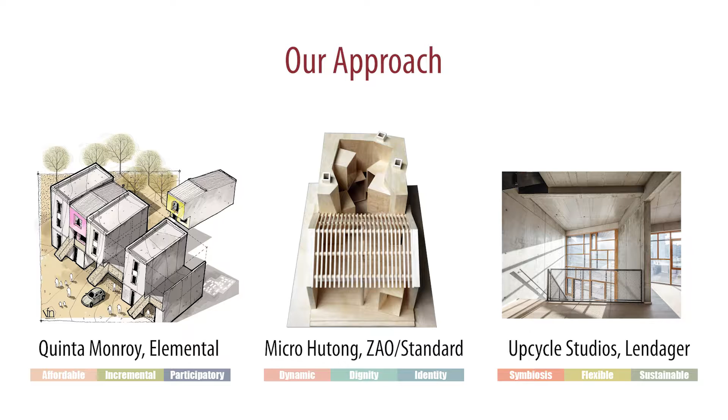By analyzing existing policies and case studies, the toolkit comes up with three things: habitability, adaptability, and belonging, following with 9 principles.

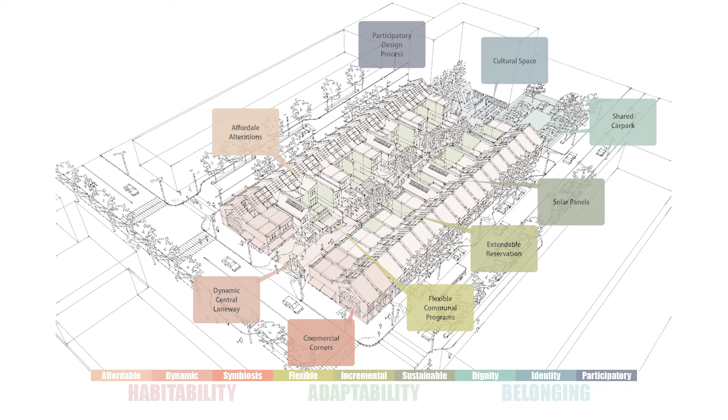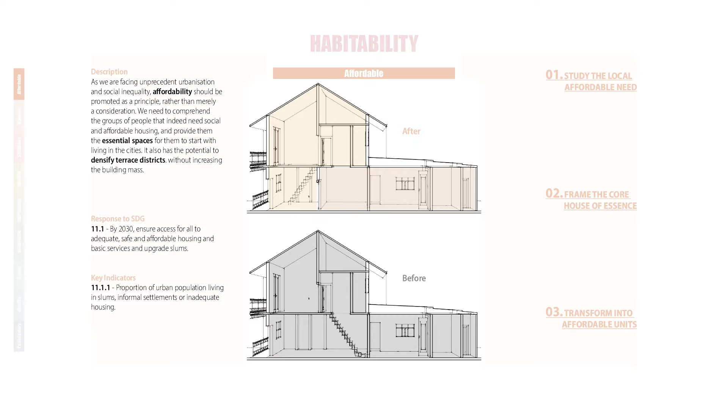As we are facing unprecedented urbanization, affordability should be promoted as a principle rather than merely a consideration. It mainly responds to SDG 11.1.

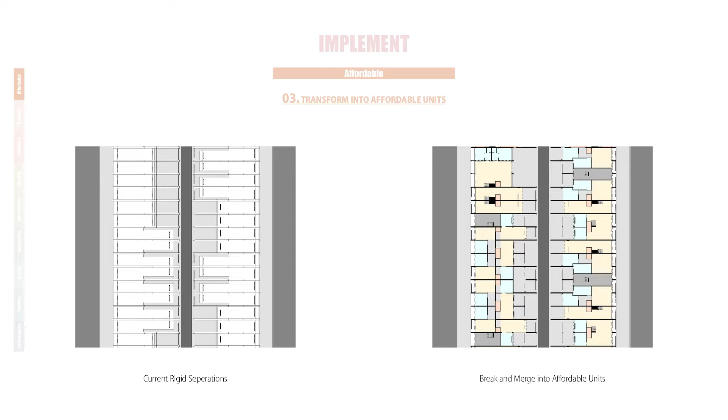The first approach is to research the local demographic to comprehend the real need for social and/or affordable housing. As the existing layout of terraces is fairly rigid, we need to consider whether to break and join terraces so that larger houses or even apartment complexes can be formed.

The second consideration of habitability is about dynamics. It responds to SDG 11.7 and has 4 approaches. The strategy is to introduce the flow of air and light to break up the stuffy interior of the room, along with greenery, bringing more vibrancy to the terrace district.

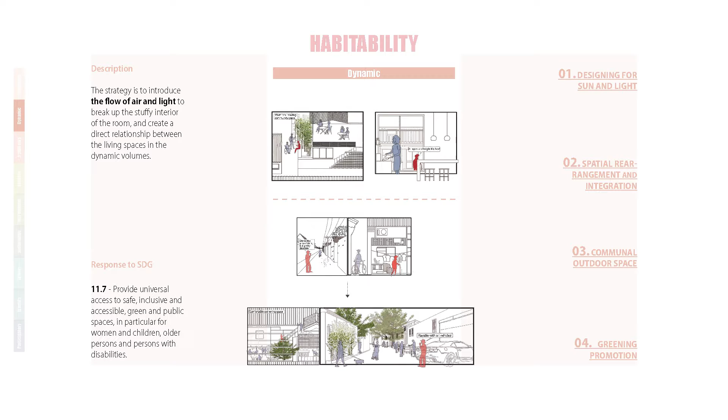The illustration in the center shows the east-west orientation affords best solar access to both aspects of the terrace. We introduce the idea of a light well and skylights above stairs, creating an architectural volume that spreads natural light throughout both levels without taking anything away from the limited floor area.

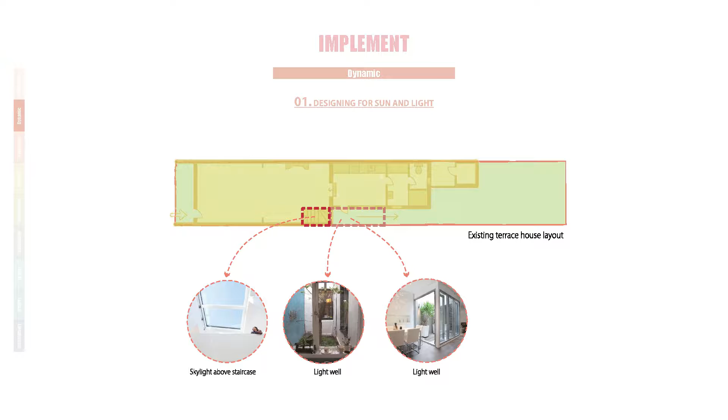Through relocating and updating kitchen, bathroom, dining and laundry areas, we maximize interior functions and available space while also responding to the context.

The backyard is now directly accessible from the living or dining spaces, providing private access to the outdoors and an opportunity for outdoor passive recreation.

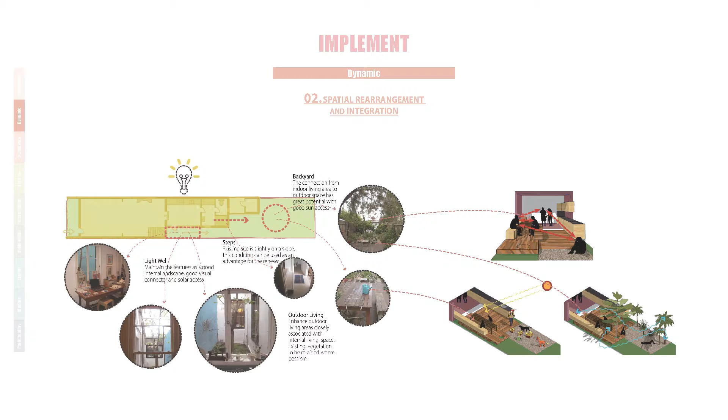This section is about the renewal of the central lane between two rows of houses. Depending on the volume and role in the traffic network, it is redesigned and enhanced as shared streets, which can meet the desires of adjacent residents and function as a public space for recreation and socializing.

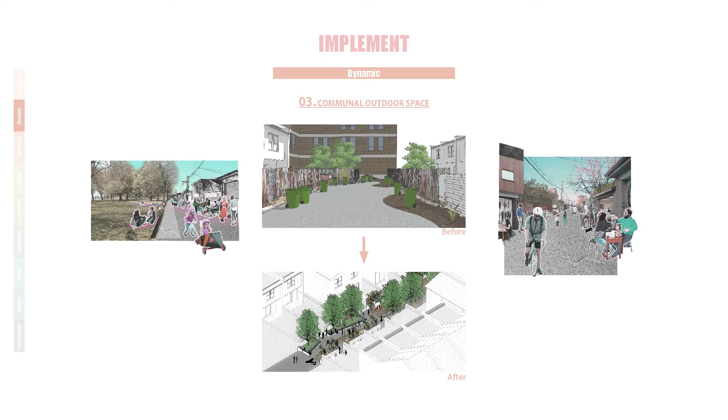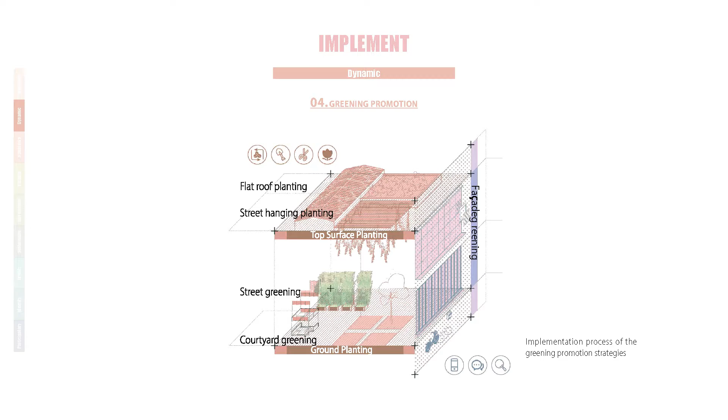Greening is deficient in the terrace district due to narrow spaces. The greening improvement strategy for our site includes rooftop surfaces, ground, and facade of terrace housing, with plants adapted to the terrace inner city environment and ornamental in winter.

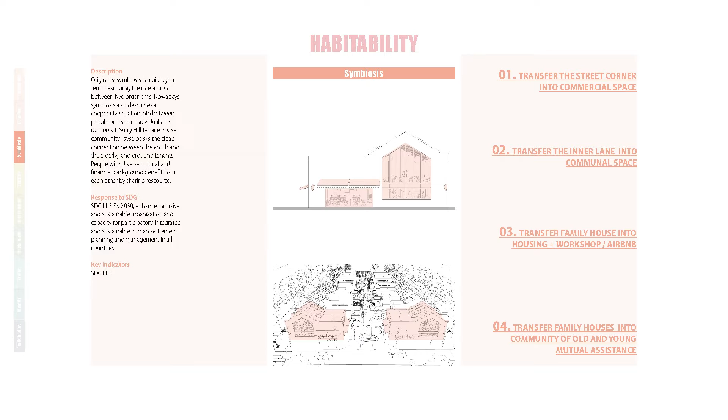Symbiosis is originally a biological term, but in our toolkit it describes a close relationship between diverse society members. No matter if you are a single person or have a large family, elderly or young, rich or poor, all are welcomed to engage in the community and society.

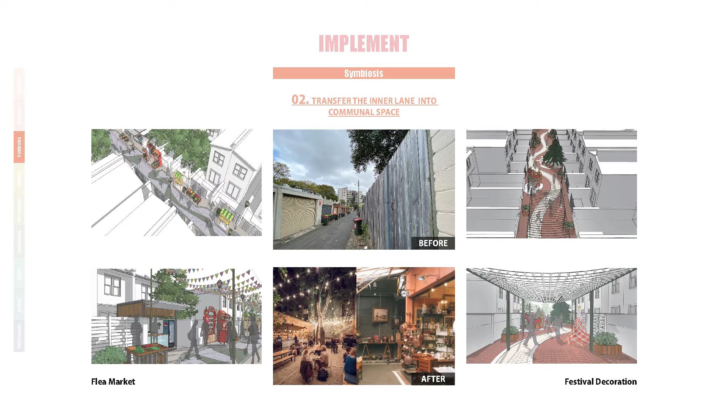The design approach includes transferring the street corner into commercial space, transferring the inner lane into communal space, partitioning one dwelling into a family house and a shared space, and merging neighboring houses into a community of old and young mutual assistance.

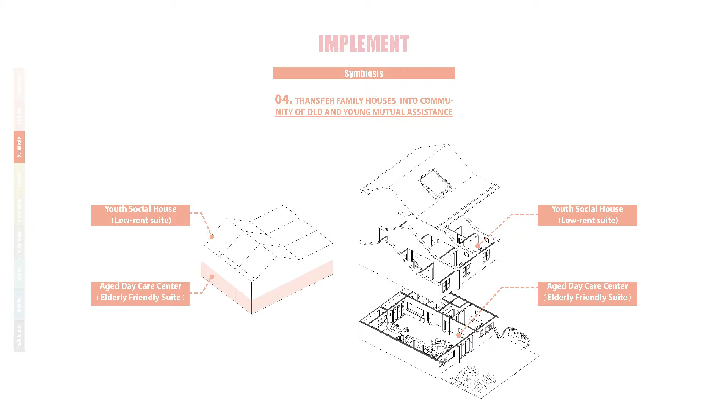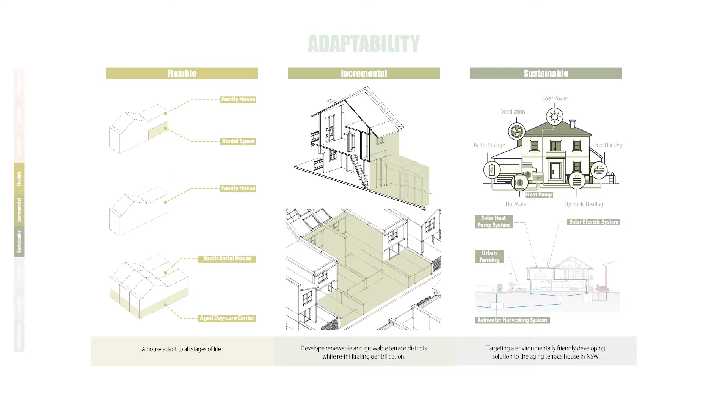With consideration of continually developing households, this toolkit targets to adapt the house to all stages of life.

For young property owners who have loan stress, the terrace house could be divided into a family and a rental space, so the house owner can earn extra income to help their family finances.

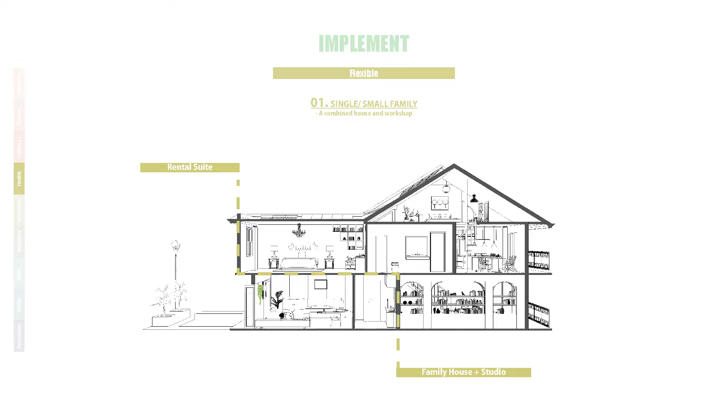For the growing family with more kids or elderly parents to take care of, more rooms are needed. So 2 bedrooms are added to the ground floor and the attic.

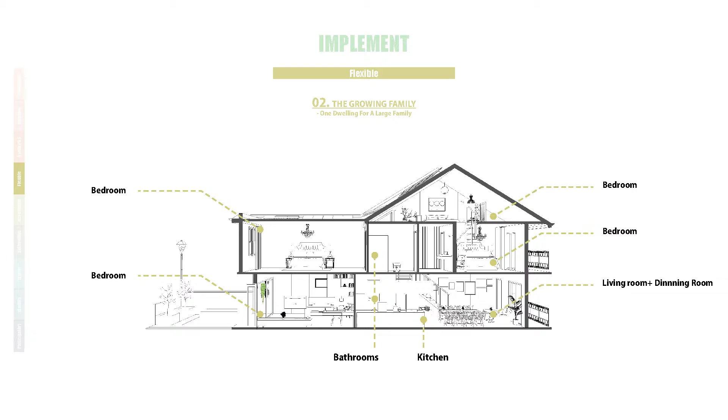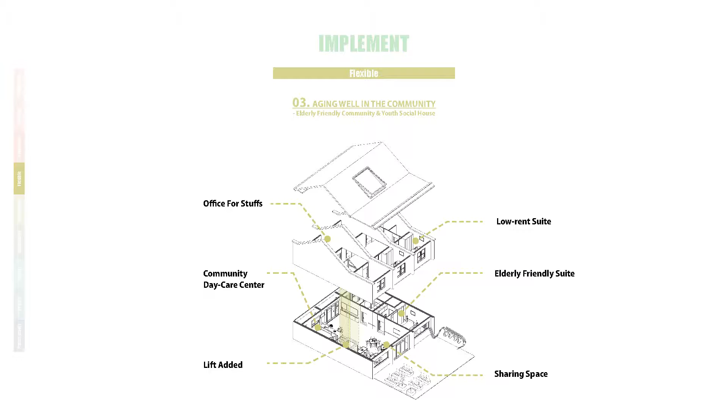Thirdly, for elderly property owners with limited mobility or who suffer from loneliness, there comes a potential choice for them to merge their units, live together, and share the spare space with people in need. This diagram shows 3 houses horizontally merged and vertically divided into a mutual assistance community of the old and young.

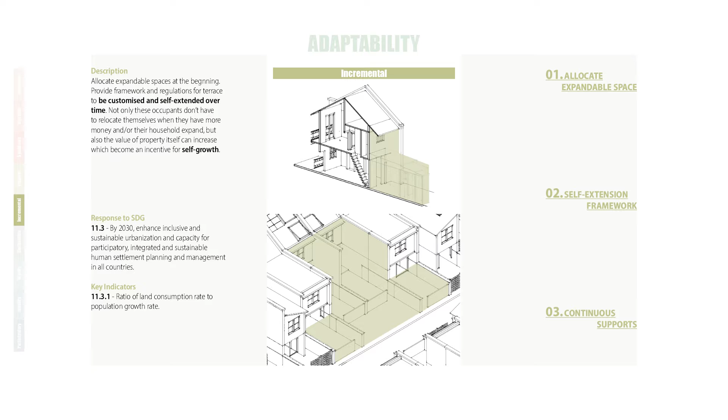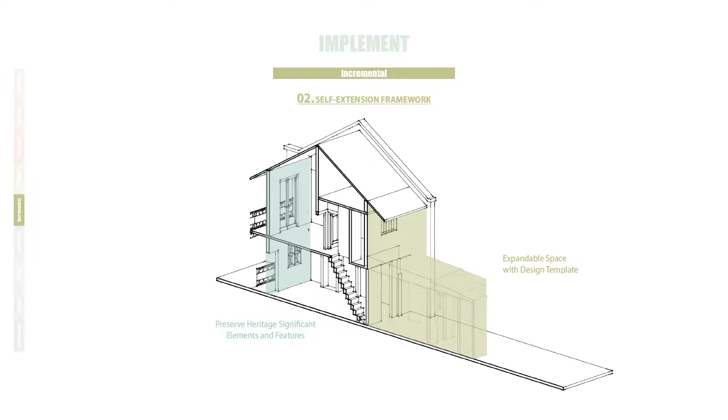Incremental is about allocating expandable spaces at the beginning, providing framework and regulations for terraces to be customized and self-extended over time. It responds to SDG 11.3. Occupants don't have to relocate when they have more money or their household expands, and the value of the property itself can increase, becoming an incentive for self-growth.

Moreover, continuous support to individuals and communities after initial construction is completed is another important intervention. The description of sustainability in SDG includes environmental, economic, and social sustainability. This design principle targets an environmentally friendly developing solution to the aging terrace house district in New South Wales.

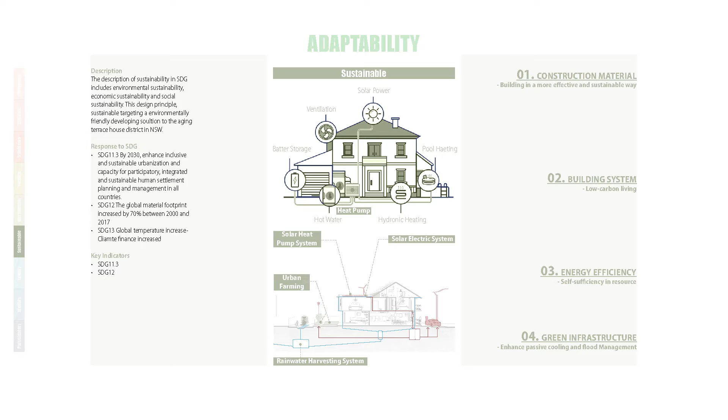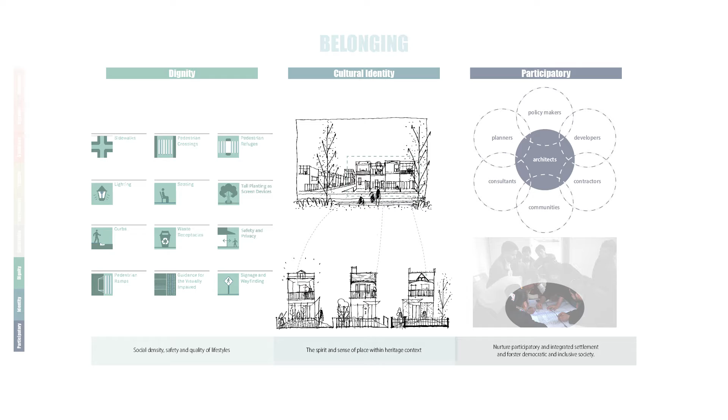The toolkit responds to environmental sustainability from four angles: construction material, building system, energy efficiency, and green infrastructure. This diagram shows the water management system of the community and tests the toolkit by maximizing natural lighting and natural ventilation with a light well.

The next main principle is about the sense of belonging, which includes three considerations. The first one is dignity. It responds to SDG 11.1 and has three approaches.

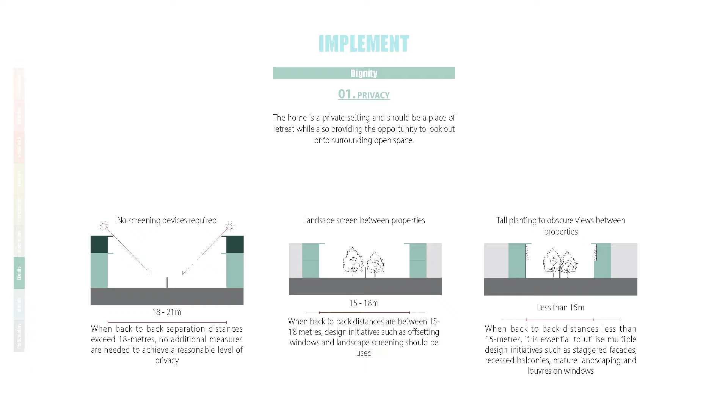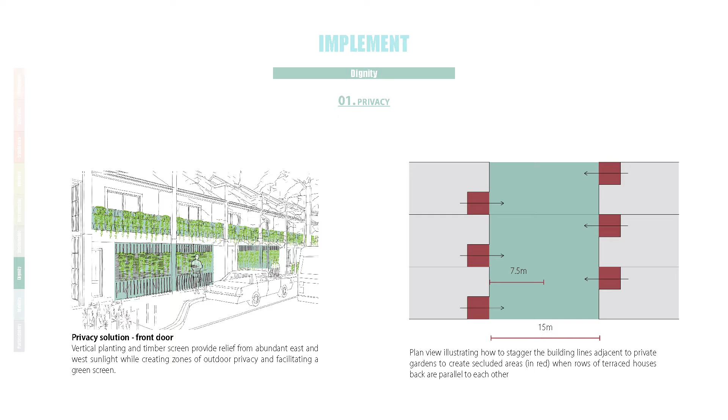The immediate proximity of individual houses within a terraced block requires greater focus on achieving visual and acoustic privacy. In our site, the back-to-back house distances between houses are less than 15 meters. Apart from utilizing tall planting as a landscape screen to obscure views between houses, staggered facades, recessed balconies, and louvres on windows can also be utilized for privacy solutions.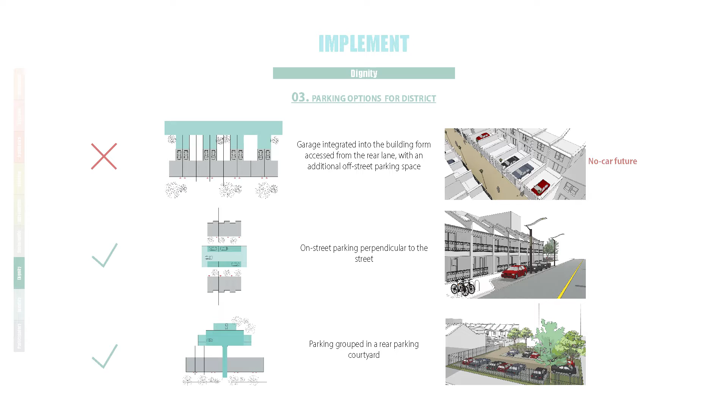Due to the no-car future projection, it strengthens our argument to pedestrianize the rear lane, since terraces in Surrey Hills have good access to other forms of transportation. So only on-street parking and grouped parking remain in our synthesized scenario of the Terrace District.

The second consideration is cultural identity. It responds to SDG 11.4 and has three approaches. The Terrace District is usually within a heritage context and is heritage significant, hence it is important to preserve and also develop the culture and features of terrace houses, and enhance residents' sense of belonging.

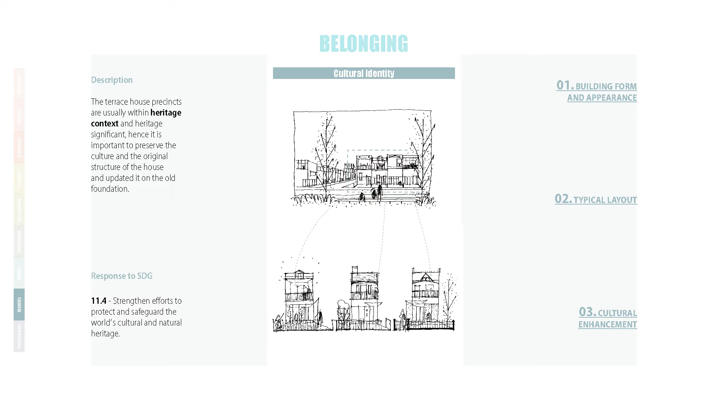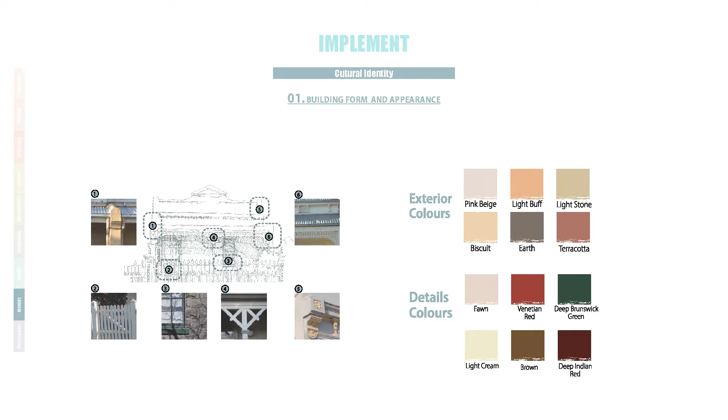The form and appearance of an individual terraced house will be largely driven by the form of the terraced block. This section sets out the issues associated with both the house and the block, including height, massing, and facade articulation, and how they help enhance the existing character of the local area. A terraced house is made up of several single-family homes built directly next to each other, each separated by partitions. When considering terrace house renewal, layouts of traditional terraces should also be taken into consideration.

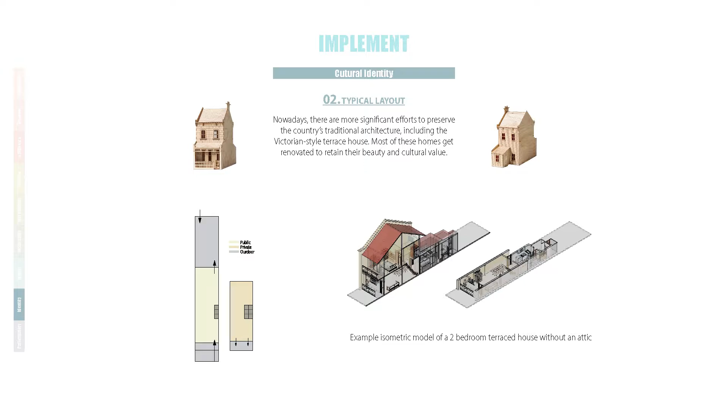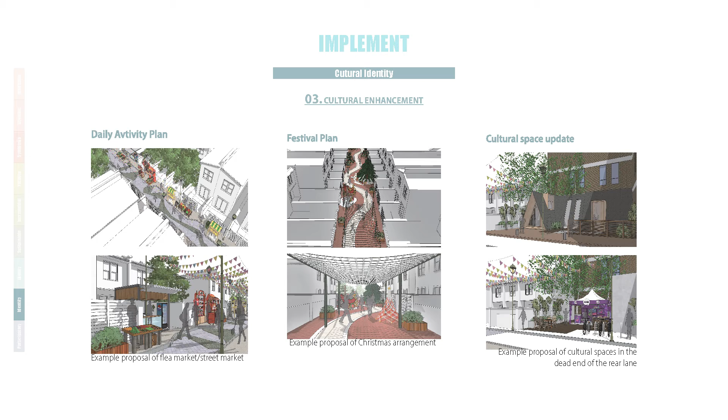Making full use of the physical spaces of buildings and public spaces, events and industries should be introduced as accelerants for gradual urban regeneration. The newly introduced events and cultural spaces support and promote each other so as to develop the culture and features of the Terrace District and enhance residents' sense of belonging.

Participatory approaches can both nurture integrated settlement as well as foster a democratic and inclusive society. It responds to SDG 11.3. In this principle, the architect acts as a mediator to bring both elites and grassroots into the design process and coordinate all key stakeholders to reach design consensus.

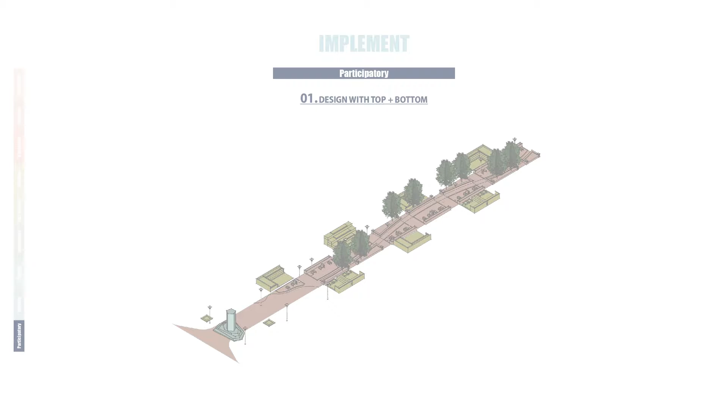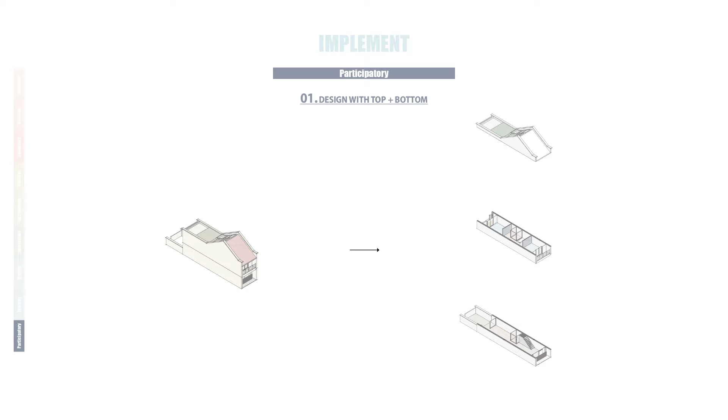When it comes to large-scale renewal, like pedestrianizing the rear lane and transforming multiple terraces into an apartment complex, the local council and/or state government should be involved. However, if the alterations are smaller scale, stakeholders can be limited to individual homeowners and communities. Further, it is important to provide diverse typologies to accommodate different ownership needs to become an inclusive community.